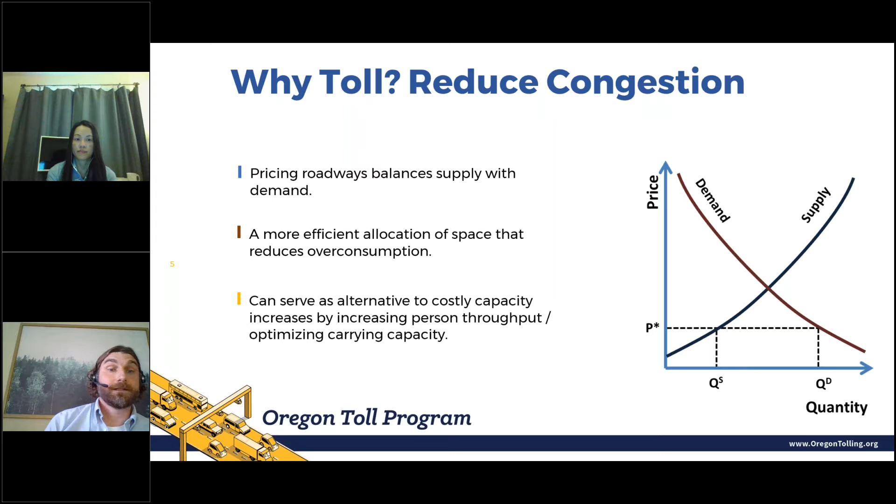To avoid this situation, a small shift in demand, which pricing can create, can have a big impact on travel time and ultimately volume. Managed lanes with variable pricing have shown this to work, and the flow can be restored on our roadways.

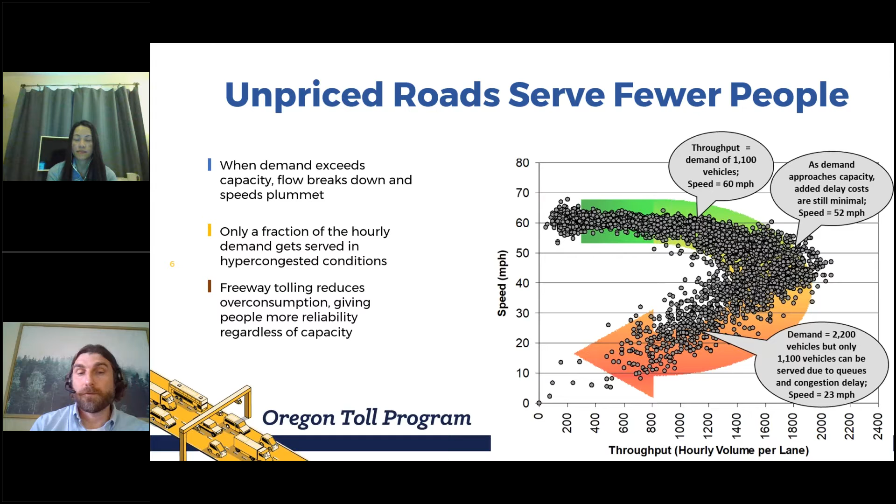So different types of tolling - there's toll lanes, managed lanes, which are generally more popular in the US, and there's tolled roads and bridges. For tolled lanes, only those lane users pay the toll, and the adjacent general purpose lanes remain free - it's a choice of lane. Whereas on tolled roads, everybody pays - it's a user fee paid by the vehicle owner, so it's more of a route-based choice.

In terms of the technology, it's open road tolling, so it's all electronic. Modern tolling systems typically use either in-vehicle transponders or license plate billing. There are some more emerging technologies, but that's standard practice these days. There are no more toll booths or plazas where you have to slow down and stop to pay a toll - there's necessary equipment to get that set up, video cameras, etc. I won't get into that, but that's what a modern tolling system looks like.

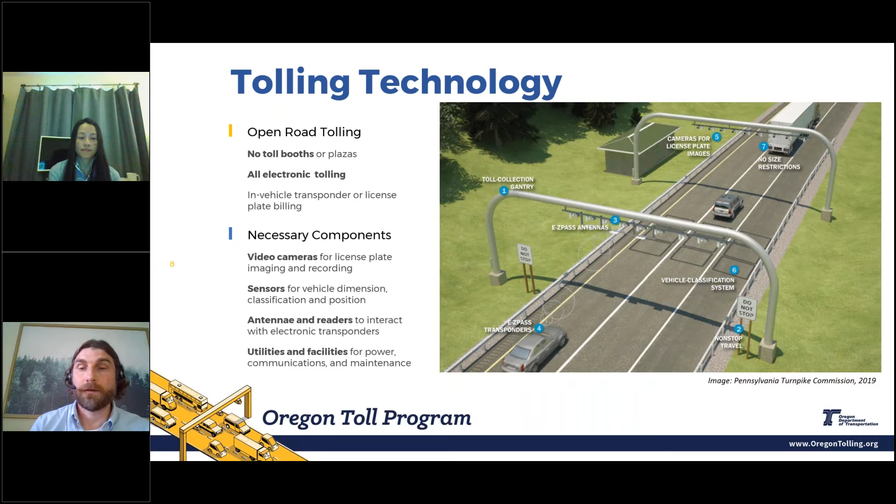Public opinion - this can get tricky. Explaining those dual purposes or getting into traffic flow theory is not an easy message to communicate to the public. It's much easier to understand supply side solutions, building more capacity, a bigger pipe. People get that - they don't necessarily get the dynamics of pricing.

One of the things we've seen throughout the country historically is that political support is critical. You need those political champions, and you need to not only get that up front, but maintain that support. In some of these studies, the planning and delivery of the project can take years, so you have to hope that political support lasts through political wins and election cycles, etc.

In terms of the public, most people are generally against tolling up front until they experience it. This has been repeated throughout the country, where public opinion prior to it is mixed at best, and lowest right before opening. But then when people see the benefits, it tends to become popular and used by a broad cross section of the public.

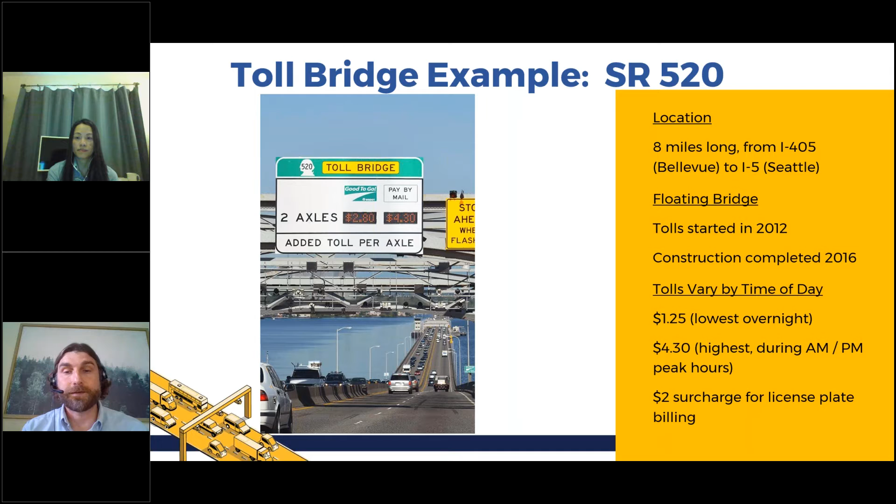So let's talk about examples for a little bit. There's many throughout the country. We don't have tolling in Oregon except for a few bridges into Washington, but it's quite common. California and Washington are neighbors, and we have an example here in the Pacific Northwest of all-lane tolling with a variable toll rate schedule on SR 520.

SR 520 is an 8-mile-long floating bridge between Seattle and Bellevue. Those tolls started in 2012, before the bridge was reconstructed, and construction was completed in 2016. The tolls vary by time of day: overnight it's just $1.25, and during peak hours, when it's highest, it goes up to $4.30. There's also a surcharge, an additional charge compared to having a transponder, of $2 for license plate billing.

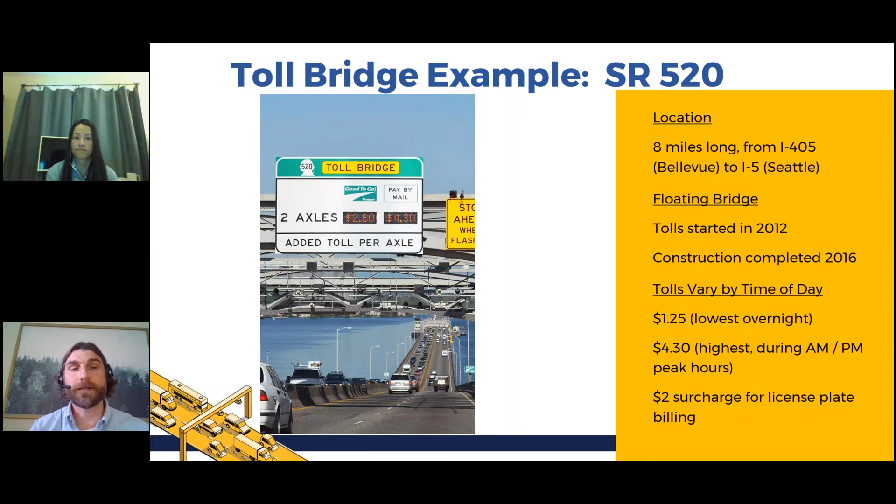So that's kind of a general overview of tolling. I'm going to hand it off to Chi to talk through the project history on the ODOT side. Chi, go ahead.

I will walk you through the ODOT toll project history here in the Portland Metro region, but it should be noted that Metro and PBOT are currently working on their own studies on how to best apply pricing in the region. They're all independent efforts, with ODOT's effort being focused on I-5 and I-205, and it's more advanced than the others just because we started a few years earlier.

So the genesis of the tolling projects comes from the legislature. In 2017, House Bill 2017 directs the OTC to develop a pricing proposal on I-205 and I-5, and then to seek FHWA approval for tolling. In response to the bill, the OTC directed ODOT to initiate the study in 2017 to explore the available tolling options, determine how and where tolling could help improve congestion on I-5 and I-205 during peak travel times, and begin to understand potential benefits and impacts to travelers and adjacent communities.

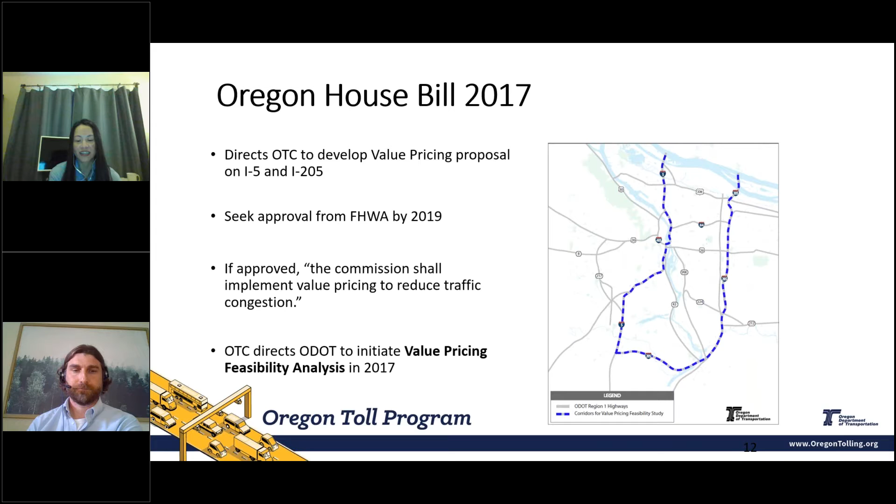The result of this effort was the Value Pricing Feasibility Analysis, which we'll refer to as VPFA throughout this presentation. The purpose of tolls under House Bill 2017 is a dual purpose: to manage congestion and raise revenue to fund congestion relief projects, and it's a balance of those two.

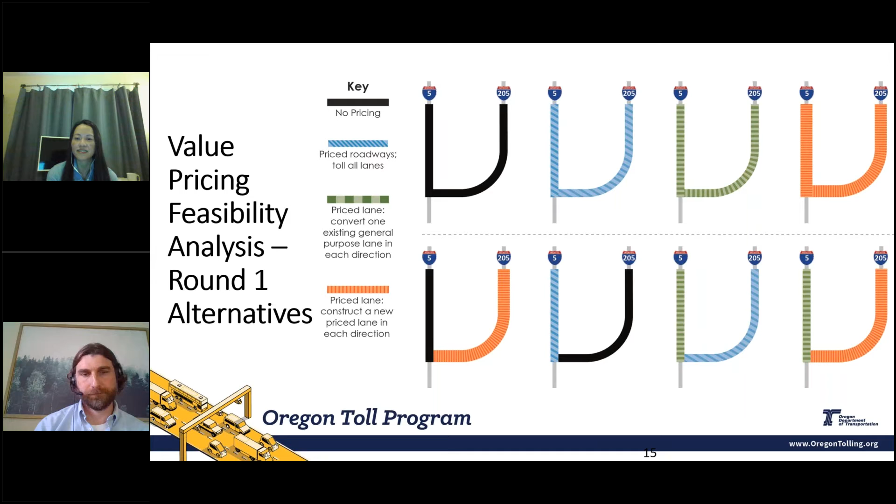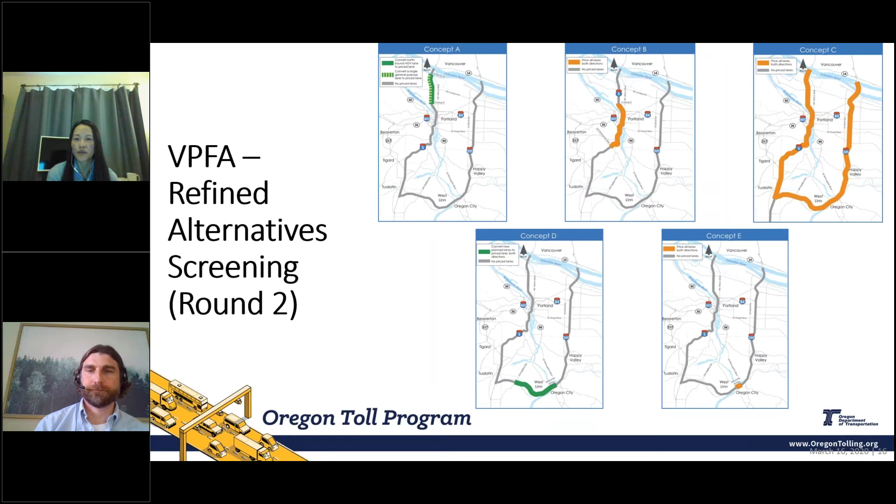From what we learned in round one analysis, we applied it to round two. In round two, we narrowed down to options that were feasible. We had 5 concepts, labeled A through E. I won't go over each of them, but you can see from the picture where the tolling would be applied.

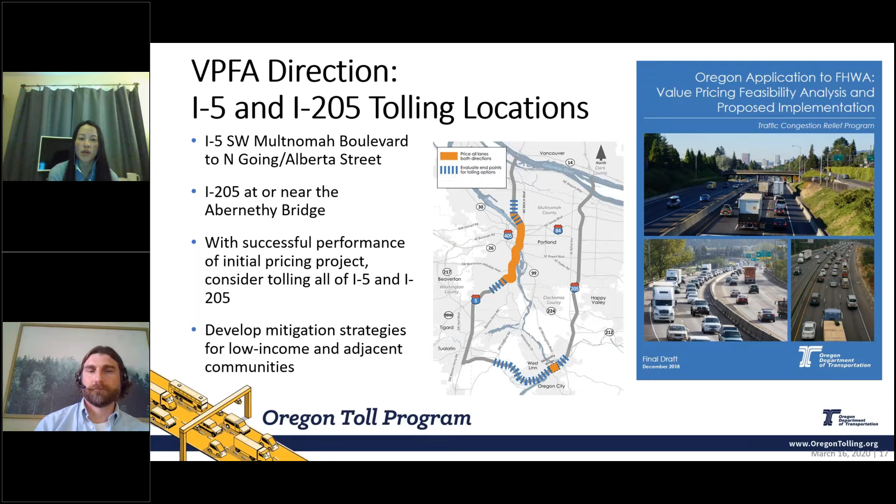Based on the results of round one and round two analysis, we produced a report to FHWA, which gives a recommendation or proposal for implementation. Within that report, we have these different options: on I-5, tolling from Multnomah to Going, and on I-205, tolling at or near the Abernethy Bridge, and then also to later apply a more regional strategy of both I-5 and I-205, and also to develop mitigation strategies for low income and adjacent communities.

So I will come back to that timeline as I talk about the next phase, but I think for just to continue with the VPFA conversation, Matt's going to present on the technical approach.

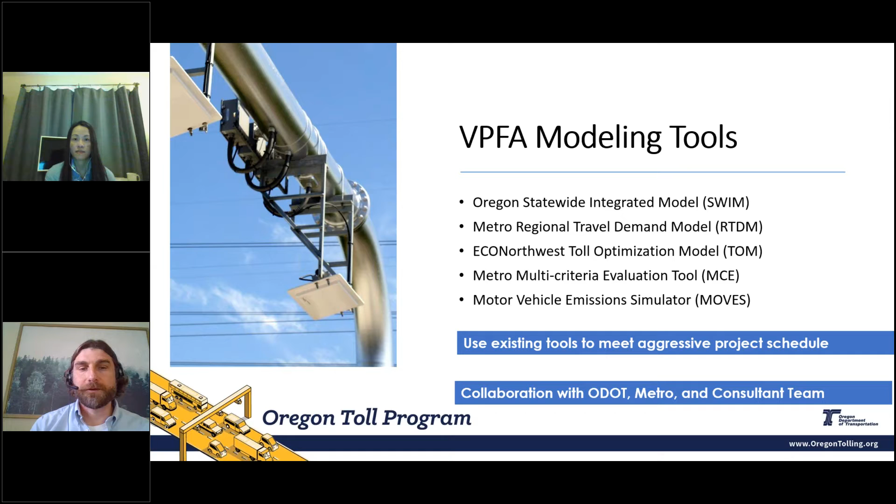Thanks, Chi. This is a technical group, so we'll talk through some of the tools we used. Like Chi said, we had about a year, so we tried to leverage existing modeling tools available to us. It's a collaborative process with ODOT, Metro, and the consultant team. There are 5 tools I'll talk about: the Oregon Statewide Integrated Model, the Metro Regional Travel Demand Model, a toll optimization model with our partners at ECONorthwest, Metro's multi-criteria evaluation tool, and the MOVES emission simulator.

SWIM was really used to identify statewide impact. This is owned by folks at ODOT, TPAU, at the statewide level, Alex Bettinardi and company. This looks beyond the metro region — what happens if we toll these roads? There's concern about diversion to other highways. We didn't see a lot of that beyond the metro region, but it was important to check. The Metro Regional Travel Demand Model is really the primary tool that pivots off of all this.

It's widely applied for a lot of planning and traffic forecasting applications. Those results fed into many of these other tools, and the way the model looks at tolling is it converts that monetary toll cost into a time penalty using value of time assumptions. That's how it gets fed in, and how we quantify regional impacts and diversion potential estimates in the value pricing feasibility analysis.

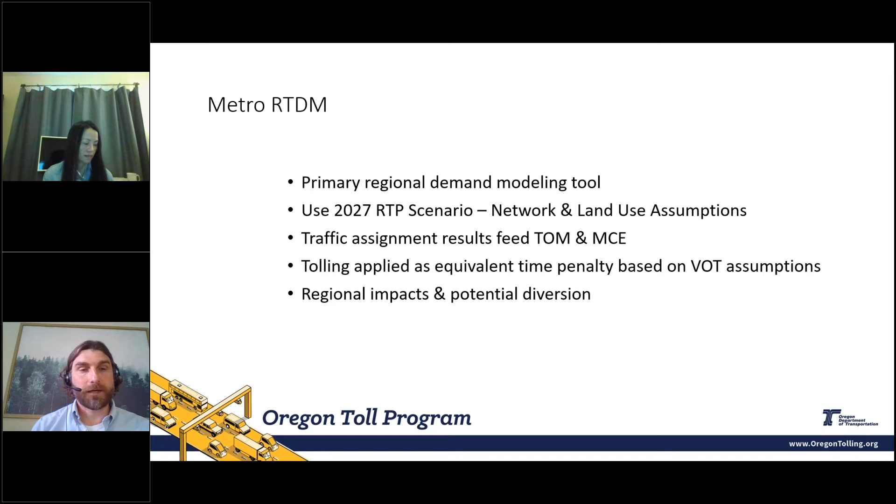The toll optimization model is designed specifically for those managed lane concepts. Like Chi said, we ran through at a high level what if we do individual lanes as well as priced roadways. So it looks at those freeway segments at a higher resolution, and is very helpful when establishing appropriate toll rates.

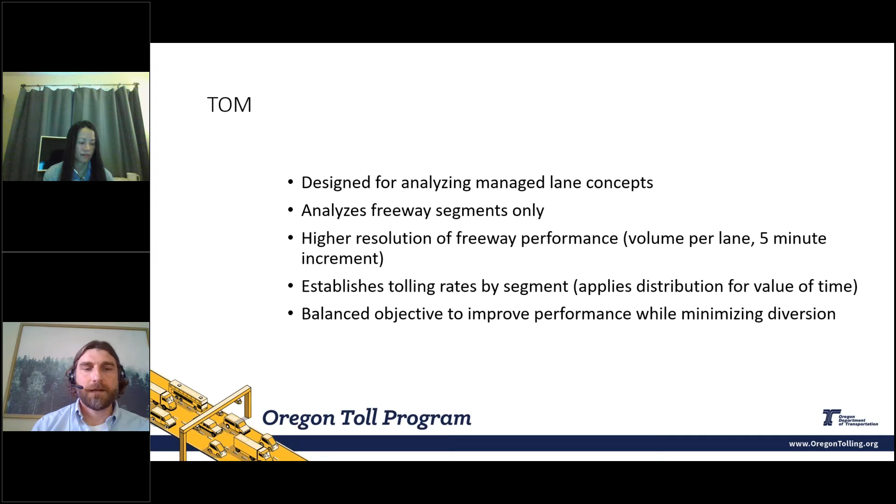The MCE is a newer tool, a few years old now, for Metro to apply benefit-cost analysis. It processes model results and gets at some of the more challenging policy and impact questions increasingly being asked of our projects.

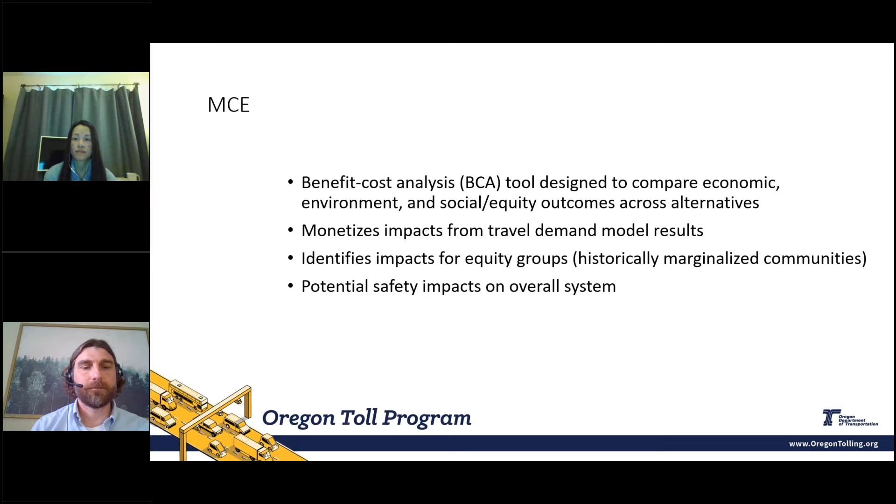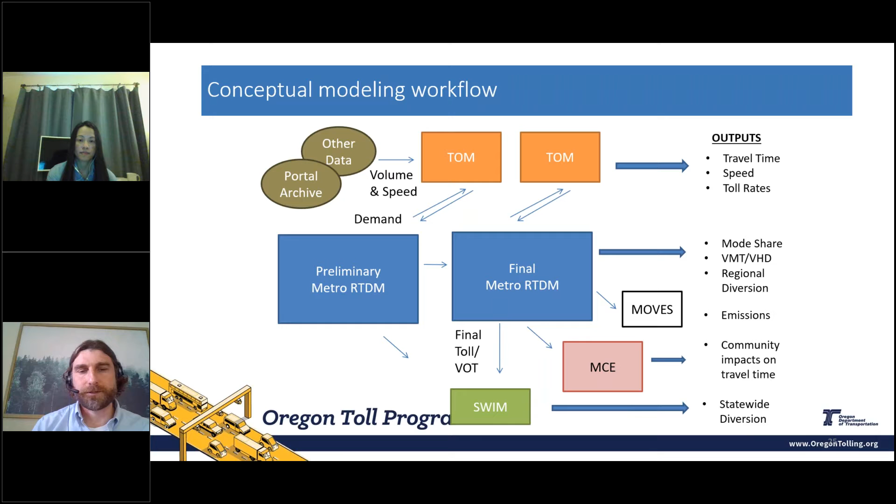This is a high level graphic showing the regional travel demand model here in the middle, and how it relates to these other tools — TOM, the data sources that feed into that, the regional model outputs, how they go into SWIM, MCE, and MOVES — and how they end up being used for performance measures to evaluate all these different concepts that Chi ran through.

Overall, she gave the big picture summary, but the results were to recommend priced roadways over price lane concepts. While toll lane concepts give you a good choice of lanes, they weren't as effective overall. Particularly when we look at what we called Concept C, which was tolling all of I-5 and I-205, there's a wider distribution of potential diversions and no unpriced lane, but they can function at a lower price, and those benefits can be shared among more users.

Whereas a managed lane would have a higher toll cost and benefit fewer users, the benefit of all-lane tolling is that it's more widely distributed. So again, greatest potential for regional performance, lower cost, better mode shift potential to HOV and active modes, but there's that trade-off that it's a regional project.

We've seen that variable tolls are proven as a tool to maintain speeds, improve travel times, and encourage other modes of travel. The VPFA analysis showed us these are also the expected outcomes for a priced roadway, this regional strategy.

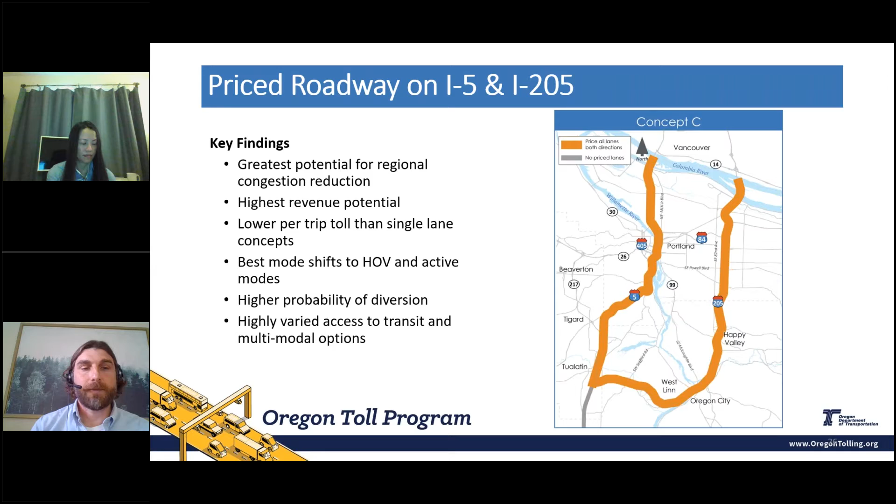So with that, I'll hand it back to Chi to talk through where we're at with our current projects that came out of the VPFA and the next steps.

Chi, I think we lost your audio. Can you hear me? There we go. Yes, you can now, you're good to go. Hear me? Thank you, I hear you now, Chi. Okay, thank you, I have to learn not to mute myself in between. Harder to get back, thank you.

So where we are now, we've done a very robust community engagement process and heard many comments. Discussion with the public, regional stakeholders, and elected officials during the 2018 VPFA revealed 3 consistent themes: concern about impacts to low-income communities due to tolling, the need for strategies to improve transit and other transportation choices, and concerns with the potential for freeway pricing to cause traffic to divert away from toll facilities, resulting in rerouting to local streets.

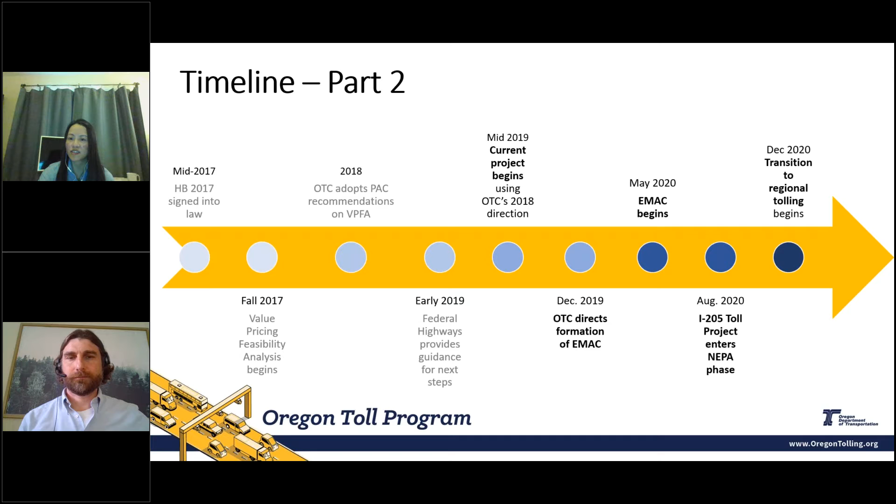For the I-205 toll project, entering August 2020, we began the NEPA phase. Then in December 2020, transition to regional tolling begins. So we have two concurrent efforts: one is the I-205 section from Stafford to Oregon 213, which is in NEPA, and then for I-5 and I-205, the regional tolling strategy, that will be going into a PEL effort.

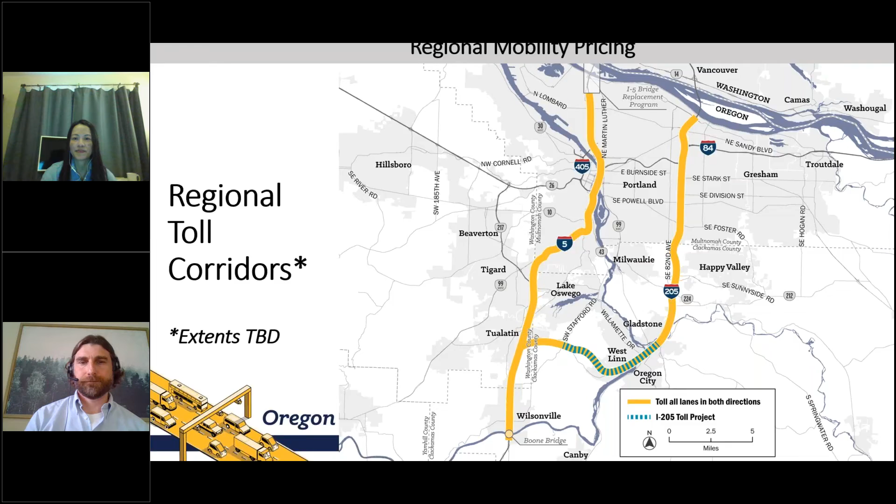Next, please. This slide is part of the Urban Mobility Comprehensive Congestion Management and Mobility Plan. The strategy for Region 1 is to have multiple tools.

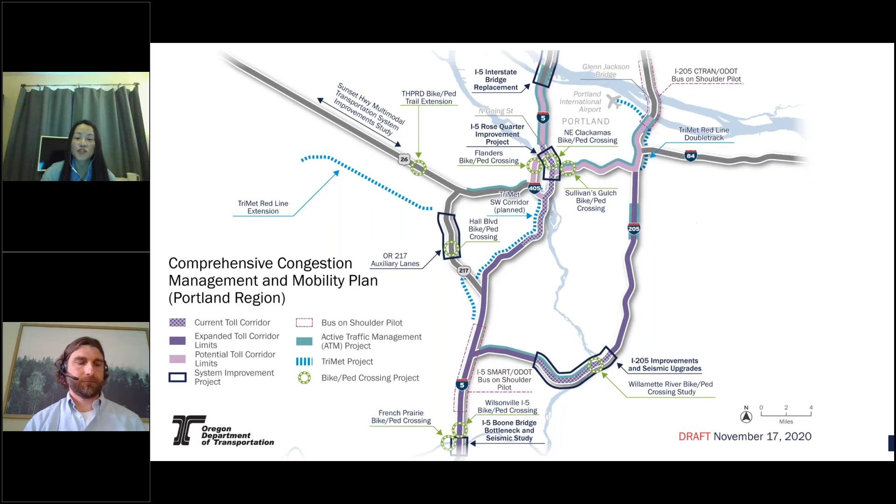This presents the different strategies. We have targeted bottleneck improvements at bottleneck locations, bus on shoulder pilot, and different strategies, but among them is tolling, which would help manage demand and also generate revenues to pay for other projects.

With tolling on I-205 being ready, I think, in 2024. Matt, can you help me? Is it 2024? Yeah, the tolling on I-205 could be as early as 2024.

Lost your audio, Chi. Can you hear me? Yes. Okay, sorry.

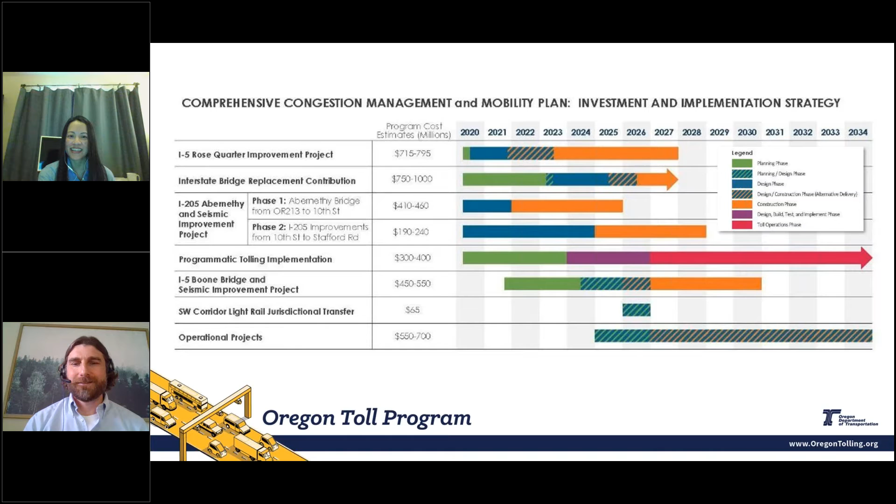Next, please. We understand that diversion or rerouting is a big issue for locals. Just to give a definition of diversion: there is positive diversion, which is a change in the way people make their trips, whether it's a change in time of day, destinations, modes, or trips not being made. People can group their trips, defer them to a different time, or telework. Those are positive diversions.

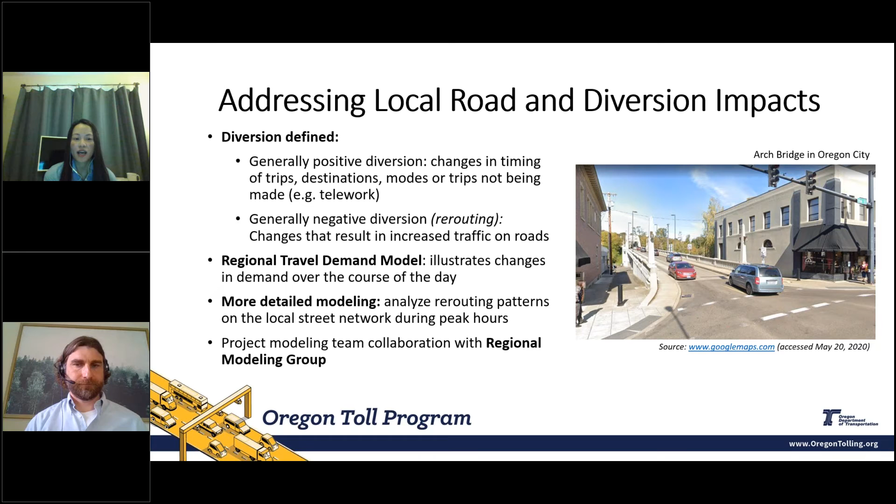The regional travel demand model illustrates changes in demand over the course of the day. We'll be doing more detailed modeling, and we have been and will continue to collaborate with our regional modeling group. Next, please.

All right, so there's a little more here. My segment is going to take up a bit more time because this is the I-205 toll project, which is further along, like Chi showed on that timeline. So there's more substance to this analysis at this point. Let me jump into some of those pieces.

This data is showing density and speed on I-205. It comes from the PSU portal, prepared by Peter Bosa at Metro during our DTA model calibration process. What it really shows is that beyond a certain density, about 25 vehicles per lane per mile, we start to see speed decreasing and breaking down.

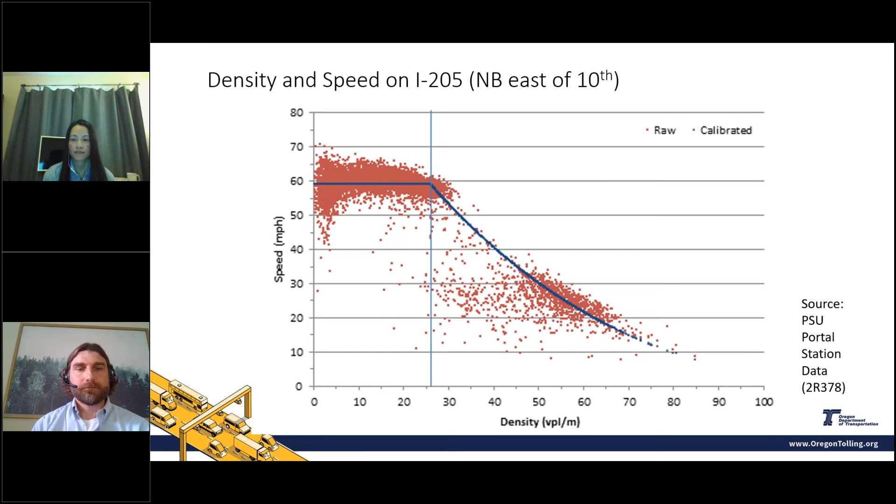Speed is maintained up to a certain volume, around 1,500 vehicles per lane per hour, and then speed starts to degrade with more demand until it finally breaks down. At that point, you actually have less volume moving through the corridor. We've all seen this when we've driven around and seen traffic break down and gridlock start happening.

So tolling, again, can be used as a tool to limit how often that breakdown occurs. There's a sweet spot where traffic volume actually increases with tolls compared to current conditions. If we can maintain that pivotal point before the conditions break down using tolls to manage demand, we can achieve that. That's again been demonstrated with managed lanes, particularly those with dynamic pricing. We know that can work.

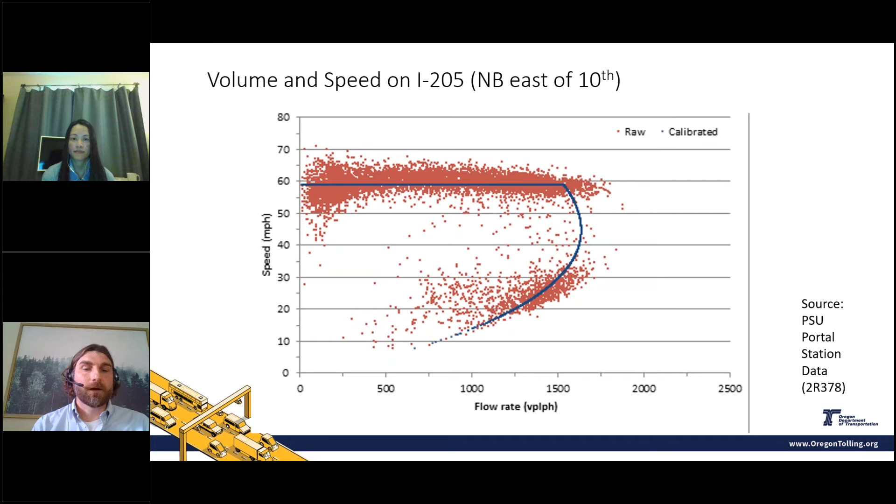So let me keep moving.

The project purpose for I-205 - you saw the same slide graphic before from Chi for the overall House Bill 2017 and VPFA. As this I-205 toll project enters into the NEPA process and the environmental assessment, there has to be a project purpose that's pass-fail criteria. So the I-205 toll project has dual purpose: to manage congestion and generate revenue. On I-205, there's a connection with the extents for the I-205 improvements project, which is a widening and interchange improvement project that parallels this.

So the I-205 toll project really aims to balance those objectives between traffic management and revenue generation. If the toll price is too low, that means congestion would remain prevalent and there wouldn't be enough funds generated to support the improvements project. While if the toll rates are too high, this can result in too much diversion off of I-205 and actually a loss of potential revenues as you lose too many users. So finding the right balance is critical to the project outcomes.

Beyond that, there's a long list of goals and objectives - other issues we're trying to tackle beyond that pass-fail project purpose, the dual purpose. So we're talking about equitable benefits, traffic rerouting, safety, climate change, emissions, providing multimodal transportation choices, economic growth, travel demand management, and integration with the future regional toll system that we talked about, and then interoperability with other toll systems in the toll system design.

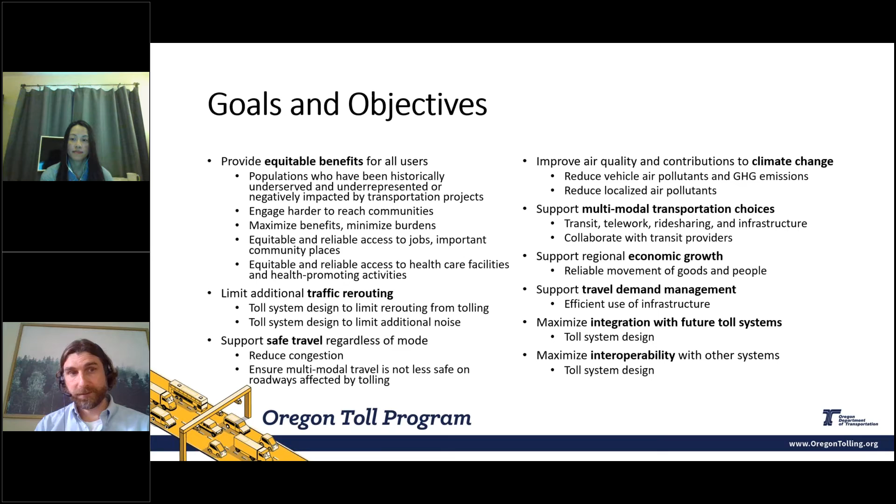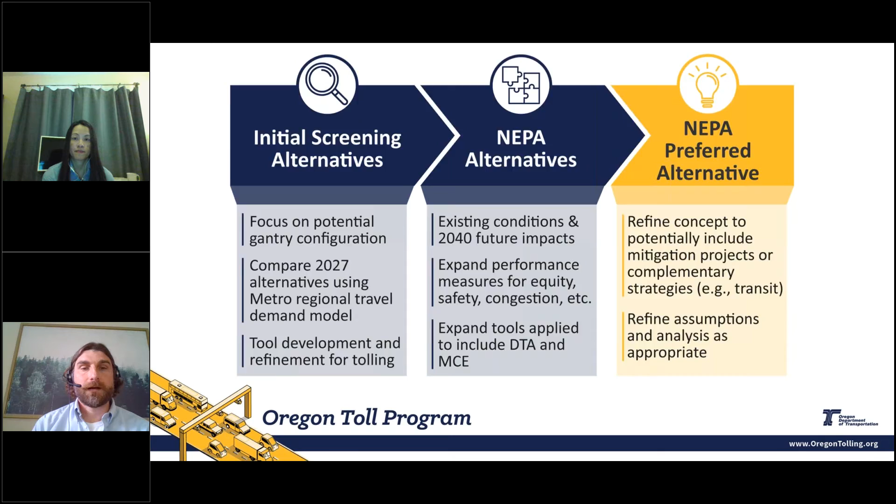Ultimately, of course, the goal is to get to a NEPA preferred alternative that's refined to include any mitigation strategies that are needed, complementary strategies such as transit, and along the way, we'll refine the assumptions and analysis tools to get there. So for I-205, just going back quickly to how this evolved: the VPFA, the feasibility analysis, we had one alternative, concept E, and the finding there was this can manage congestion, generate revenue - the primary purpose - it's effective for I-205.

In the initial screening, we came up with 5 alternatives. I'll run through those as well as the no build. So, are there certain toll configurations that have better outcomes?

In the environmental assessment, we'll be down to 2 toll alternatives for detailed study along with the no build. What are the impacts in detail of these different alternatives using our more refined tools, and ultimately getting to a refined project that will be brought forward to implementation.

I'll run through these 5 alternatives briefly. The simplest one, easiest to understand, is a toll on the Abernathy Bridge. It's just a bridge toll, single point, easy to understand, but really limited ability to manage traffic with just this one location. We saw a concentrated rerouting pattern emerging through Oregon City.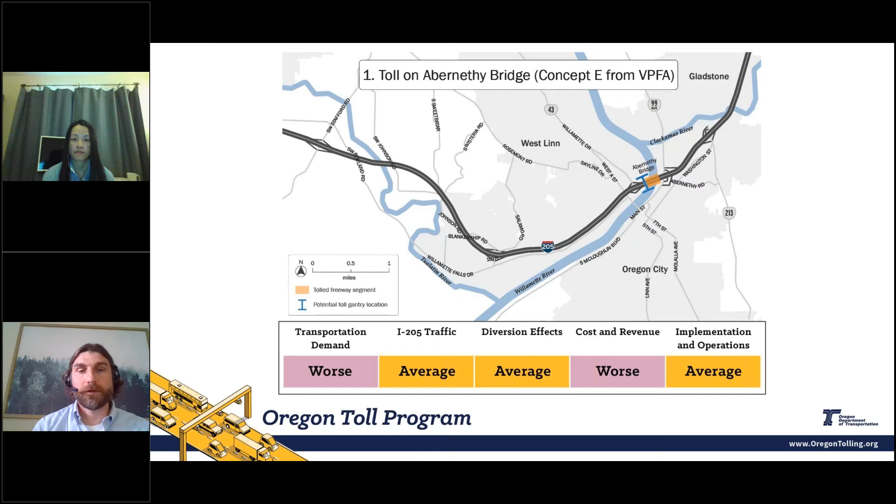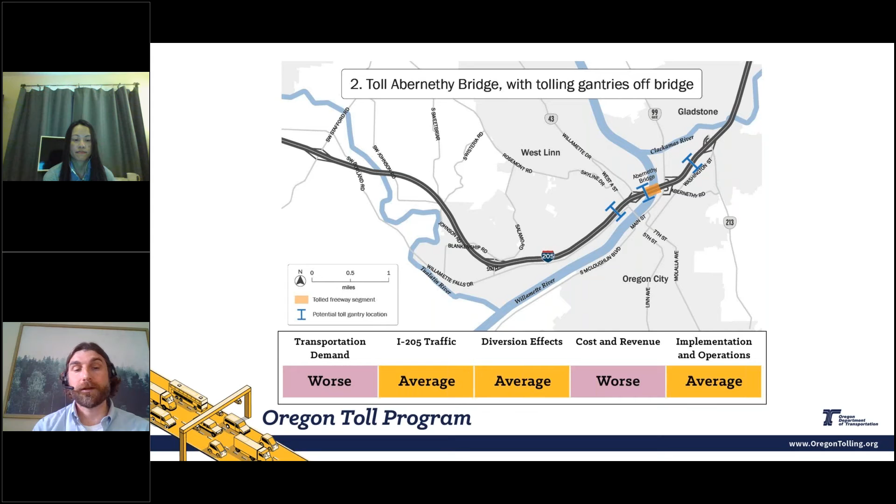With one toll point, there's a concentrated potential for rerouting there. We tried to mitigate that by placing gantries on either side so that anybody who hops off I-205 and gets right back on might be captured. Ultimately, we saw that wasn't necessarily the majority of the diversion happening, but that was one of the alternatives tested.

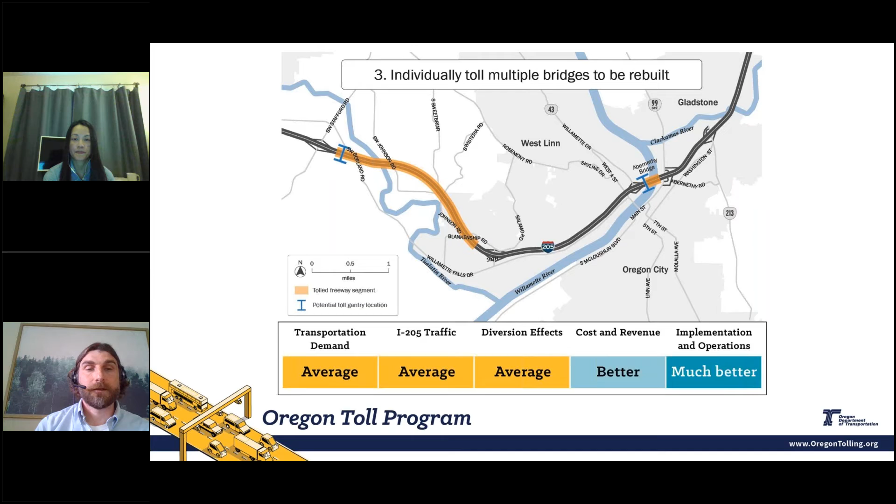Another alternative, alternative 3, splits the toll between 2 locations. A through trip, someone just passing through, essentially experiences the same toll cost as in alternative 1, but someone getting off locally would essentially pay half the toll if they're only using one of these locations.

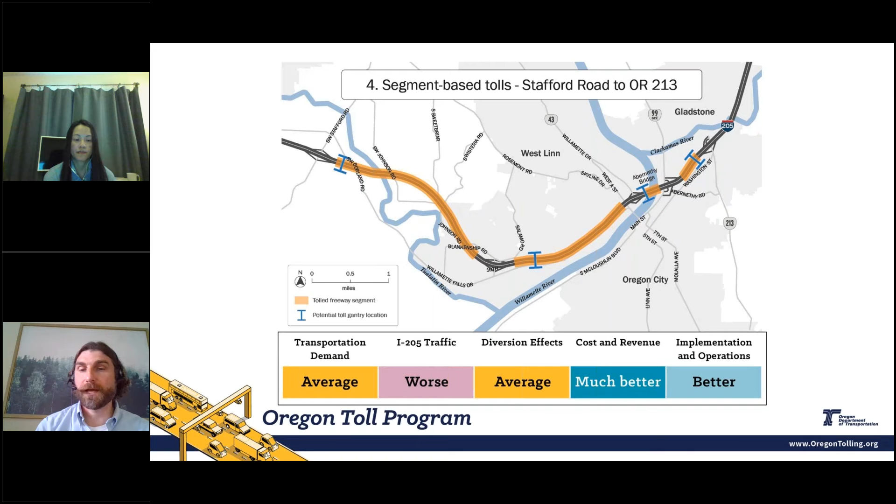Advancing that theme of breaking up the toll, this is alternative 4, which conveniently breaks up the toll into 4 segments. This is the most flexible for traffic operations, but most complex too, from the alternatives we were looking at, from a pricing structure.

The final alternative was alternative 5, a single zone toll. If you entered anywhere, whether on the main line or one of the local ramps, you paid the same cost - basically an entrance fee into this piece of the corridor. So a through trip pays the same amount as a local trip. This is a little more complex, more toll location points, but easy to understand because it's one toll rate for everybody.

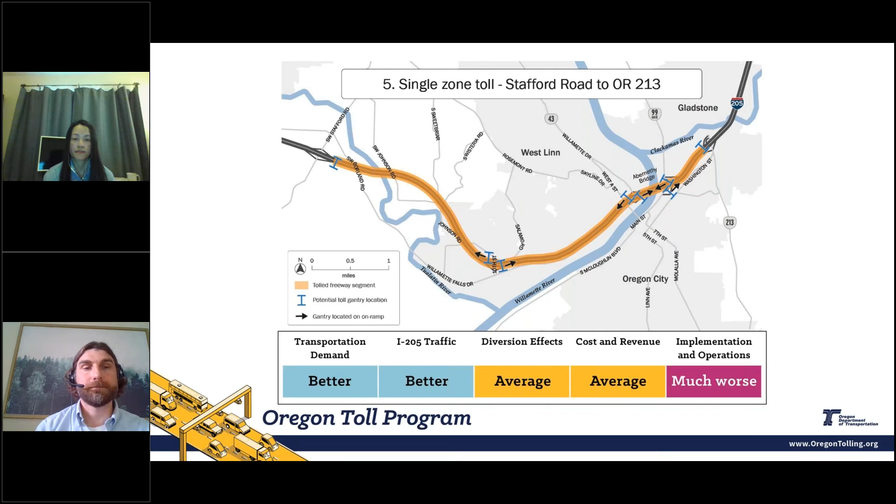Our regional model results looked at changes on I-205. We saw less overall traffic compared to the no toll, no build scenarios - daily volume decrease of 15 to 35% on 205. We actually saw more diversion off of I-205 during off-peak hours on a percentage basis.

Peak hours were decreasing a little less, even though we assumed higher costs, I guess in large part because of the travel time differences, right? When the surrounding network gets congested as well, those alternatives might not be quite as attractive.

Overall, we saw the diversion was pretty well aligned with the corridor. The diversion rates quickly fell off as soon as you looked outside of the toll segment. The decrease dropped to about 10 to 20% between I-5 and Stafford Road to the west or south, using the north-south I-205 orientation, and to the east or north, daily volume decreased only 5 to 10% on 82nd Drive. So it was kind of a stronger local effect than a regional effect.

We didn't see a big shift over to I-5, for example, that people might have expected.

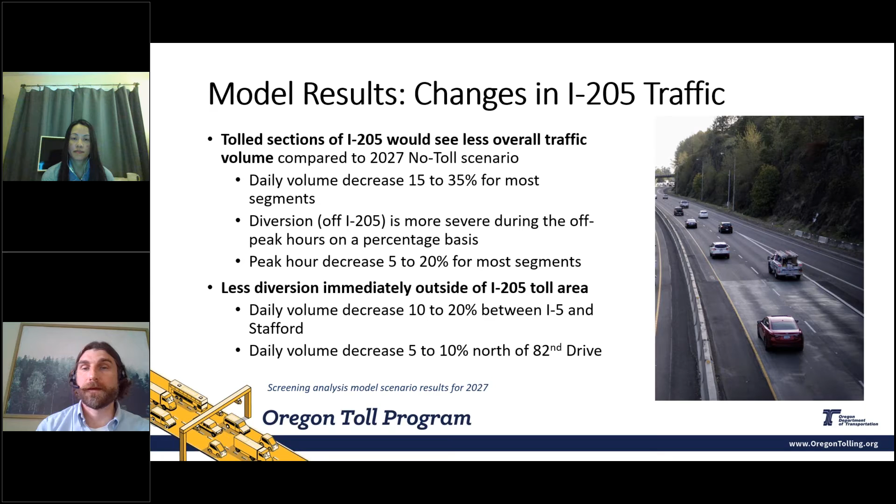Talking on that diversion topic, Chi kind of hit on there being maybe good diversion or bad diversion - that's one way to look at it. We also looked at where this traffic is diverting to. There are regional components like I-5, where we didn't necessarily see a big differentiation, not as much as some folks expected. Local, near the tolled area, we did see a significant difference, and that's where these alternatives really play out differently.

In terms of the better form of diversion, we did see transportation demand management components - changes in time of departure, destination, shifts to shared rides or transit. I think folks wonder if that will really happen, and most people would assume rerouting, the bad diversion, would be the main one, but we did see evidence of those TDM changes. There were fewer drive-alone trips, more shared rides, by about 4,000 to 5,000 per day. The shift to transit was relatively small for this I-205 concept, fewer than 500 additional transit trips. So most of the shifts were SOV to HOV.

Overall, when we looked at performance measures like VMT and VHT in the system, we do see overall fewer cars on the roads, less time spent driving, and less congestion overall in the region.

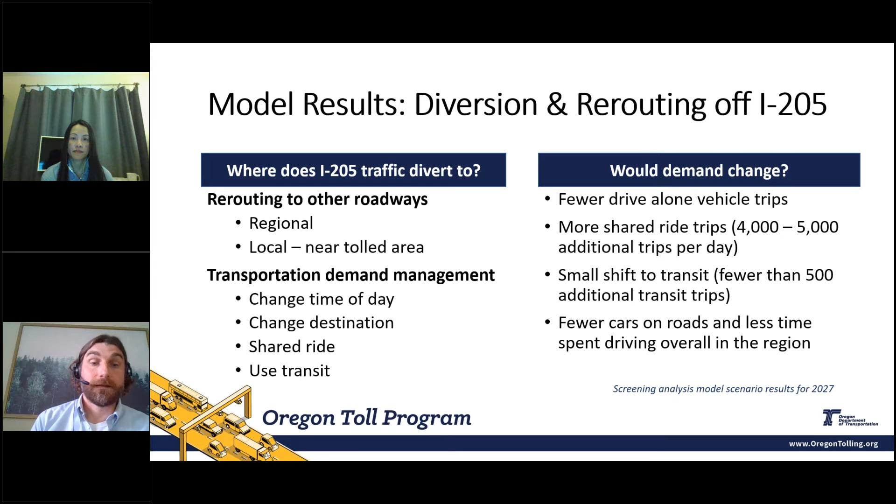Overall, the two alternatives that moved ahead were the ones that broke up the tolls. Alternative 3 broke it between two points, and alternative 4 as well.

There was different evaluation that went into this: the overall system effects, what was happening on I-205, the level of diversion. A couple of things that caught our eye or were concerning were those concentrated rerouting patterns that emerged. We talked about alternative 1 having a concentrated route through Oregon City, and alternative 1 also just had the overall least effective performance.

Alternative 5 kind of had a little bit of the same thing, where it favored a through trip. It was better for a through trip, but without that local discount, there was a bit more local diversion concentrated on the outer extents of the toll zone, including in Gladstone.

Alternative 4 overall, when you spread out the toll, you spread out the rerouting effect. So there's a wider geography, but it ends up being less concentrated and potentially less impactful. And with more toll points, you have greater long-term flexibility to manage the system and adapt to the regional system.

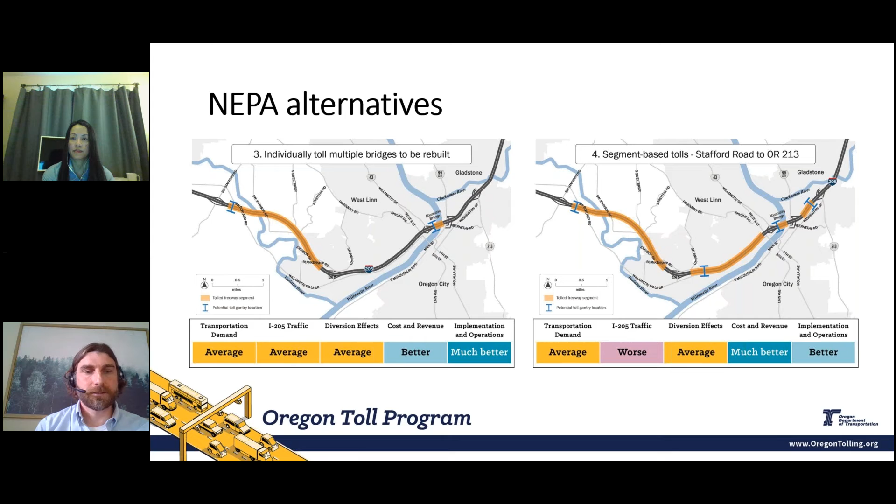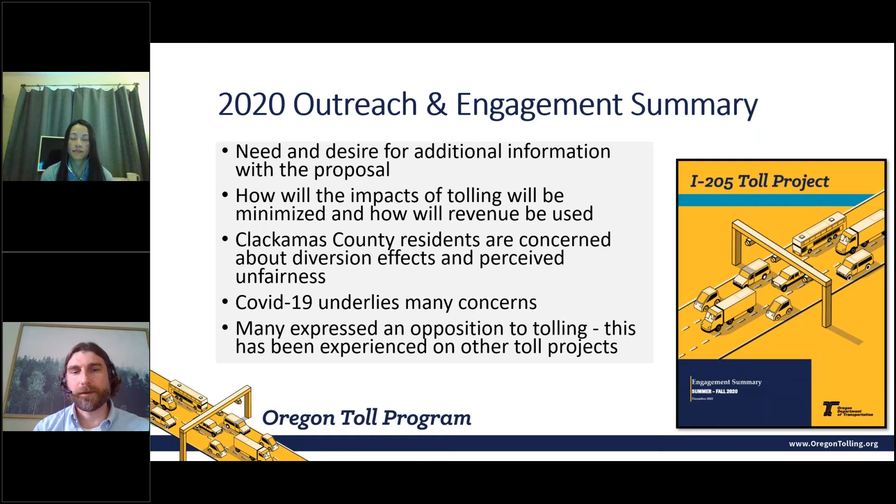Again, not surprising, but there's opposition and requests for better and more information. So we're working on that.

The project has kicked off the environmental assessment, providing more detailed analysis through that, including the traffic impact analysis. Technical analysis won't be completed until next year, but we do have some early results to share. We're not just going to wait for some big grand reveal—there will be pieces coming out in increments. So I want to share a few of those with this group.

One is the corridor user analysis, which we just published recently, so I'll get into that a little bit. We also have a draft methodology report for the transportation technical report, which will be the big deliverable covering traffic impacts and multimodal impacts. I also want to talk about the sub-area dynamic traffic assignment model for the I-205 corridor that we've been developing in conjunction with Metro.

Let me jump through each of these three quickly. First, the I-205 corridor user analysis. Here we're using the StreetLight data platform—I think most of you have heard of this big data mobility platform. We're using that to help us understand user travel patterns in the corridor, using pre-COVID 2019 weekday data to answer where users are coming from, how far, and which routes they're using as they go along I-205.

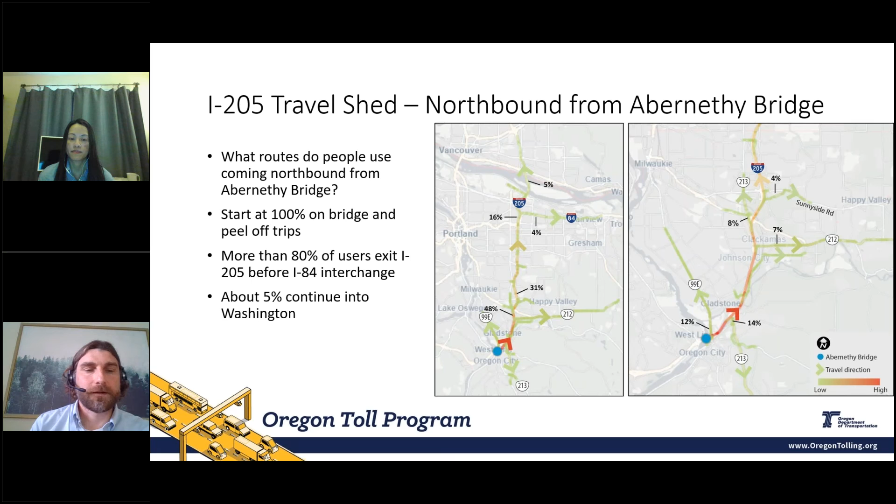One thing that was interesting is that about 80% of the trips had already peeled off before you get to I-84. So in terms of Washingtonians or trips destined to Washington, that was about 5% or less continuing on into Washington.

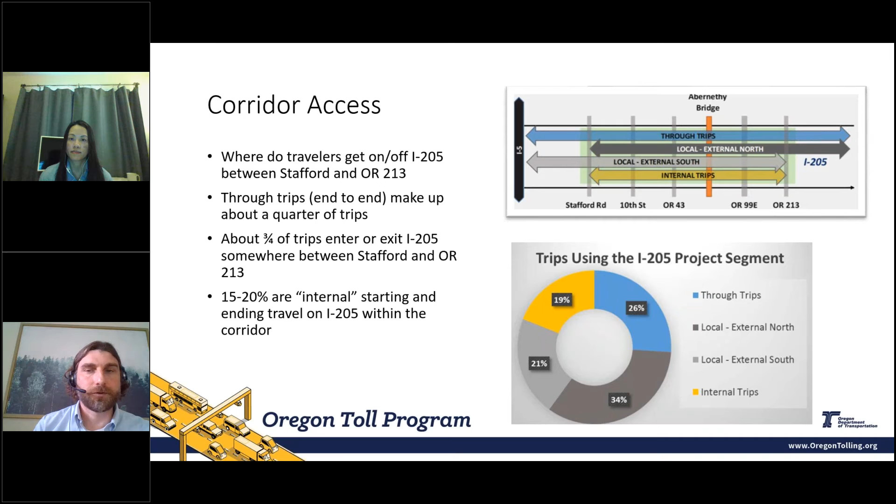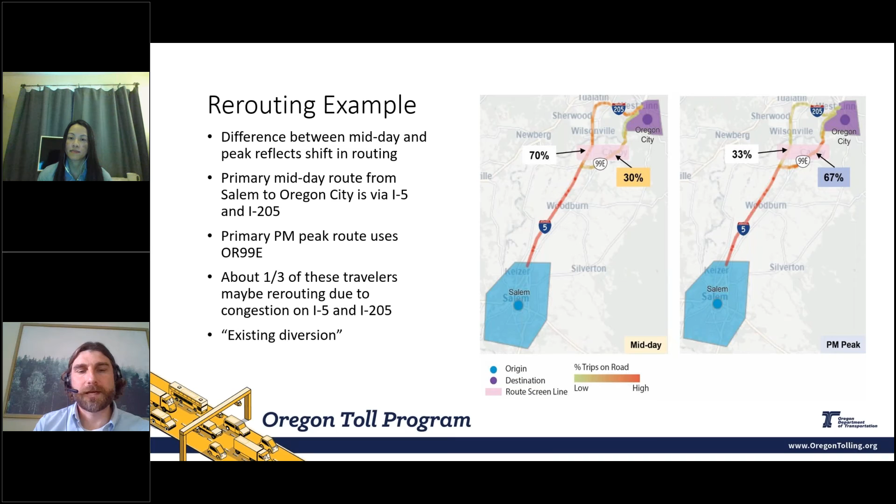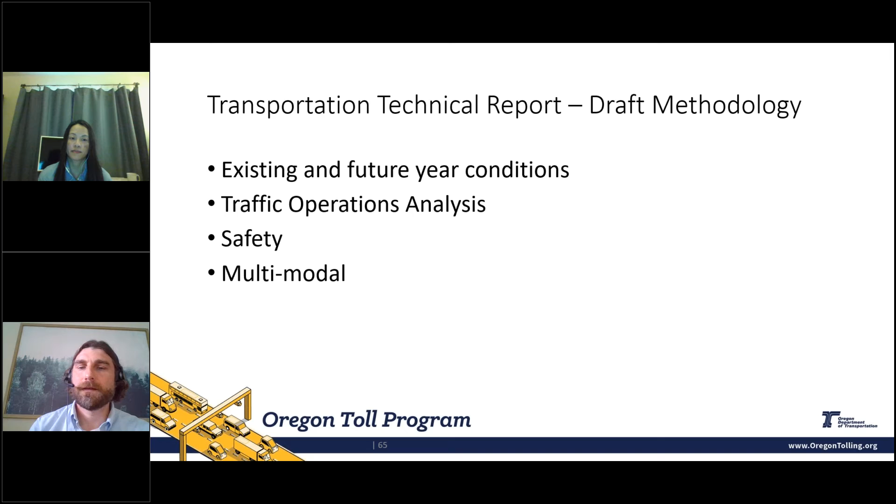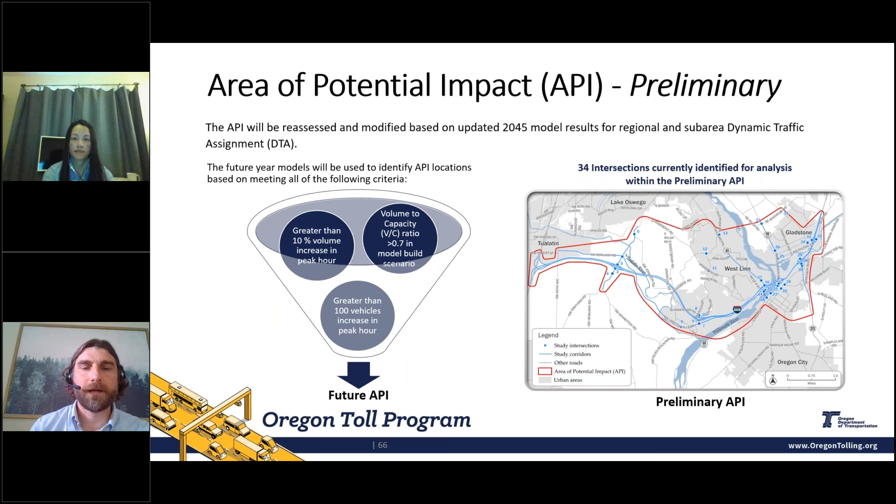In terms of travel forecasting, I mentioned this earlier - we'll look at existing conditions, interim year and future year. We'll be using the regional travel demand model to develop those. We'll be doing traffic analysis.

I think this is relatively straightforward for this audience, but just so everybody knows, there are really 3 levels to the traffic analysis. We're going to start with the regional model, then go to the sub-area DTA model, and then do the traditional location-specific traffic operations analysis - a multi-resolution modeling approach. So again, looking at 2045, but also short-term, the 2027 horizon shortly after opening.

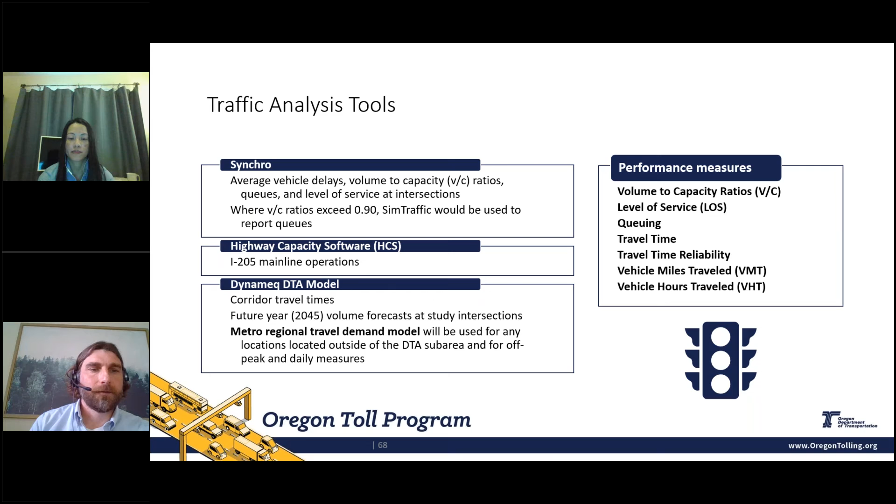So let me talk about the DTA model a little bit. We're really working closely with Metro and their team - they're really kind of taking the lead on this. So it's going from the regional travel demand model to a regional DTA structure, then zooming into the sub-area DTA with a lot more detail.

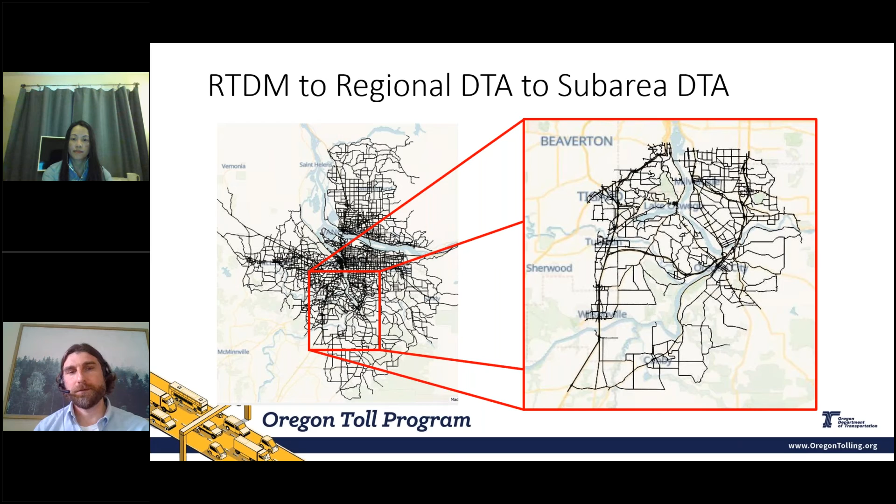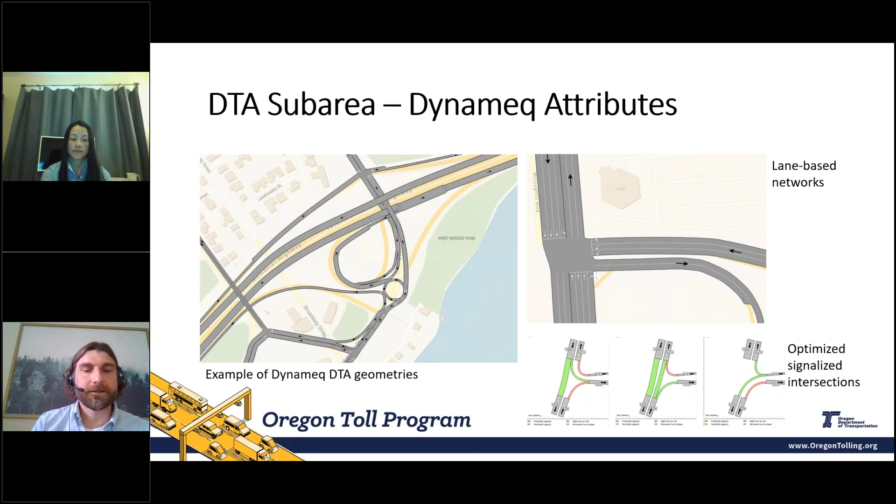The DTA model, for those of you who are familiar, is a lot more detail than a regional travel demand model. It's got the lanes in there, specific intersection control assumptions - simplified relative to the micro simulation and VISSIM analysis, but making a big step towards that kind of analysis.

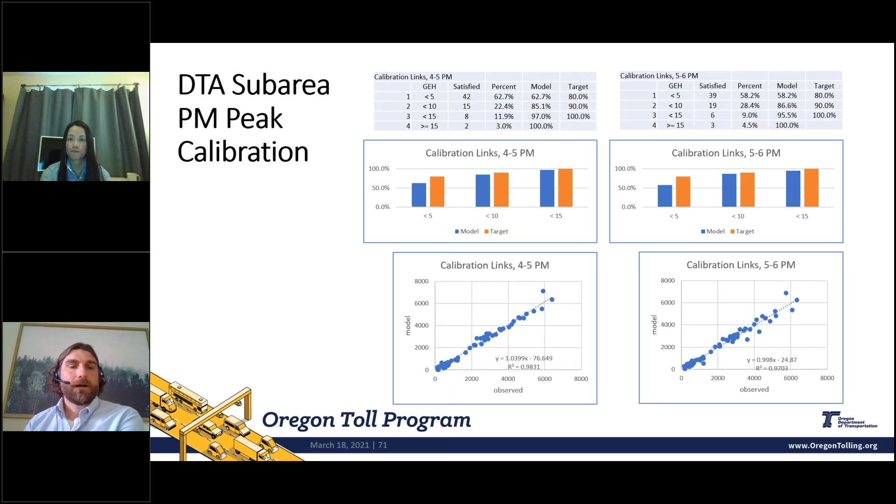I won't get into details here, but the calibration process was calibrated to volume and travel time. I can't thank Peter Bosa enough for his efforts working with us to get this all calibrated and up to speed. That's kind of where we're at right now - we're in the process of developing these tools, defining their approach, refining some of these modeling tools, and moving this project ahead. So with that, I'll hand it off back to Chi to talk about the regional mobility pricing project.

Can you hear me? Matt, can you hear me? Okay, good.

So as I mentioned earlier, we have two efforts going on right now. One is the I-205 tolling project that Matt just described, and the second is the regional mobility pricing project, which is looking at I-5 and I-205 as entire corridors. We're going through the PEL right now, and we just started.

For those that aren't familiar with PEL, or we also call it pre-NEPA, it allows us to use planning products and documents, reports, analysis. The benefits are that it reduces duplication of effort in different project phases, encourages early engagement to help develop the project vision, shared understanding, and goals, and also has the framework to ask key questions and make robust project decisions. It also gives us the opportunity for partner and public input on these decisions so that we can rely on them for future phases.

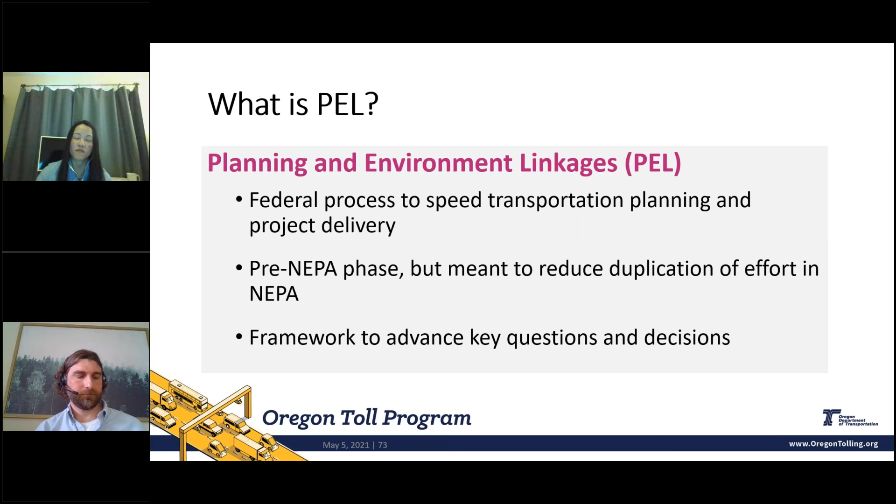So we'll be building upon the past work of the VPFA. All the work that we've done through there, we'll take key pieces out of it - all the benefits of the stakeholder and public concerns, all the traffic analysis and the alternatives development. We also will rely on the EMAC committee to help us with the continuation of development of the equity framework, and we'll be coordinating with the I-205 toll project.

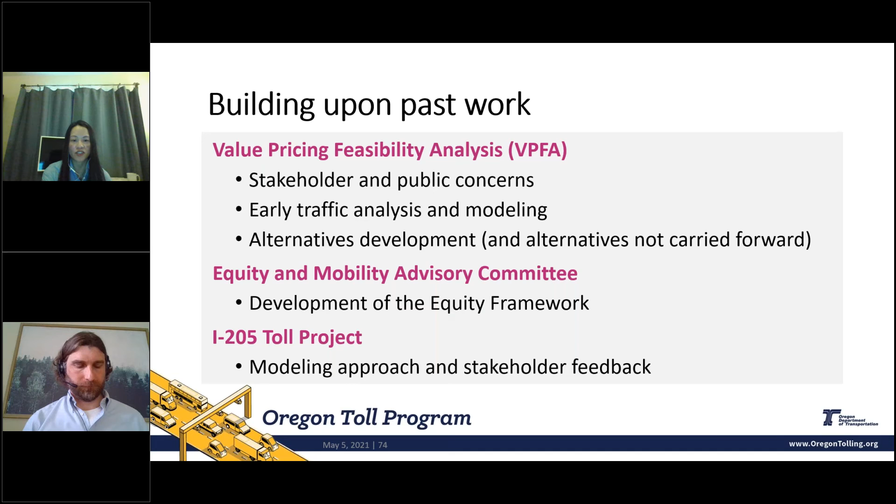So the key questions that PEL will focus on: regional strategy to address the primary goals and priorities, how equity concerns can be best addressed and brought into tolling projects, clarifying relationship to regional projects, and then also screening down to best alternatives to carry forward to the detailed NEPA analysis.

The PEL outcome we want to achieve is to clearly communicate the project goals and have frequent communication with our partners, and also have shared understanding of project schedule and inputs. With the outcome, we hope to have a very clear statement and purpose of the needs and goals and objectives, have the performance measures established, and also have the alternatives for NEPA and the NEPA document classification, whether it's an EA or an EIS.

And this is the timeline for that. We're discussing key questions, and heading into early summer we'll be developing the draft purpose and need. Then we'll move into the initial screening of the alternatives. We'll be refining the screening alternatives by the fall, and then in winter is when we have the NEPA purpose and need. Early next year is the NEPA alternatives.

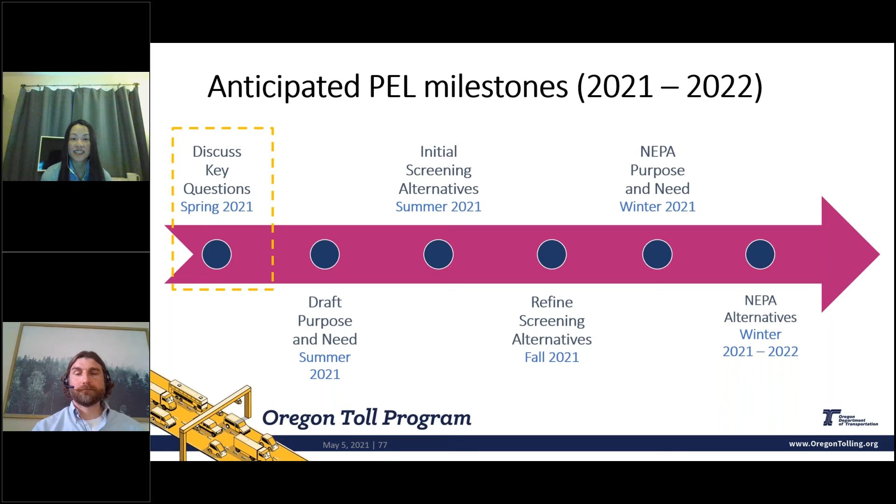So that concludes our presentation, and we're now open for questions.

Let me open the chat. Carl, how do you like us to handle this? I'm still trying to access the chat. I can go ahead if you'd like - I can read off some of the questions that have been coming in, and then you can answer that way if that's easier. I think that would be best. Thank you. Okay, so let's do that.

So one of the first questions we received earlier: there aren't many comparable alternatives in this region that drivers can take. You mentioned that the model doesn't show much diversion on non-freeway roads, but this may be very well related to the lack of alternative routes. Is the tolling project also considering improving the regional transportation network so drivers can have more choices?

Matt, do you want me to address that? I think you choose. Yeah.

In an earlier slide, we said we look at the transit component. That's one option for people to switch modes. I think part of this is balancing revenue generation and congestion. As we have the revenue, we'll be able to build some of these planned targeted bottleneck locations, which makes the flow on the facility another enhancement.